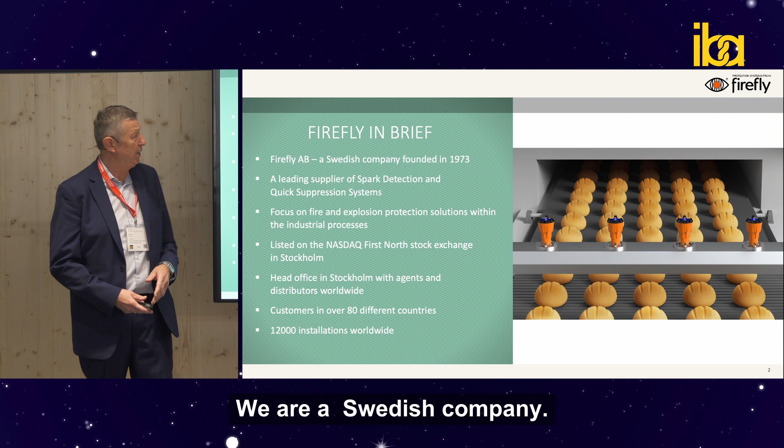Some words about our company. We are a Swedish company, on the market since '73. So actually we had our 50th anniversary some weeks ago.

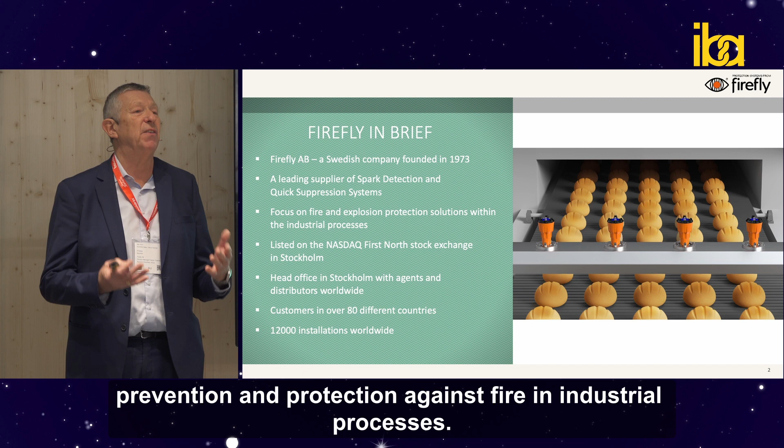We are leading in spark detection and quick suppression systems. What we are doing, actually, for 50 years, is working with prevention and protection against fire in industrial processes. We are protecting the machine. This is what we are doing.

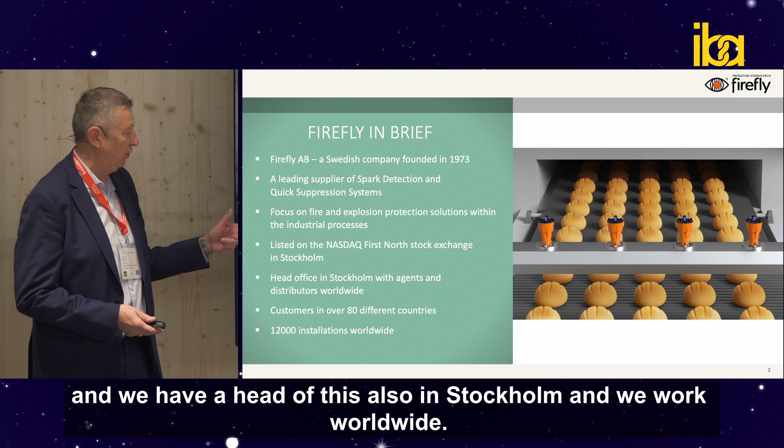We are listed on the Stock Exchange of Stockholm, and we have a head office also in Stockholm, and we work worldwide. We work today in 80 countries, and we have more than 12,000 installations. This is a number of some of our partners worldwide.

And I will start from the basics and look at what the baking industry is. First of all, you have two kinds of baked product: the pre-baked product and the fully baked product.

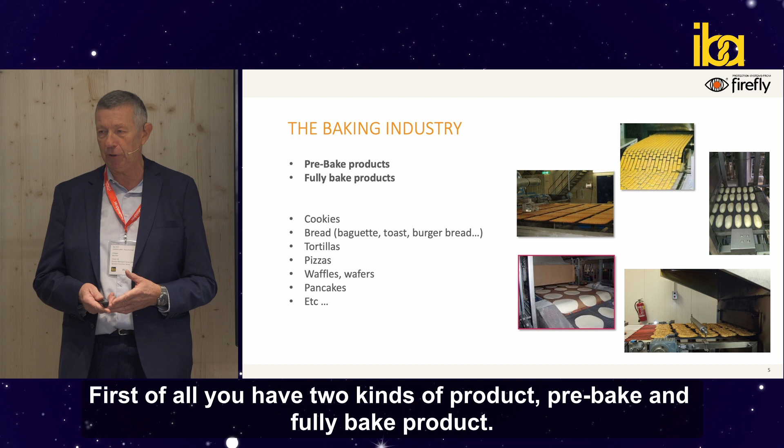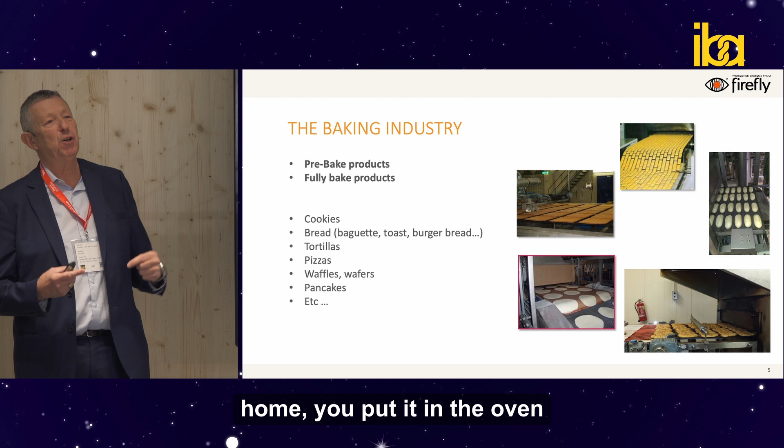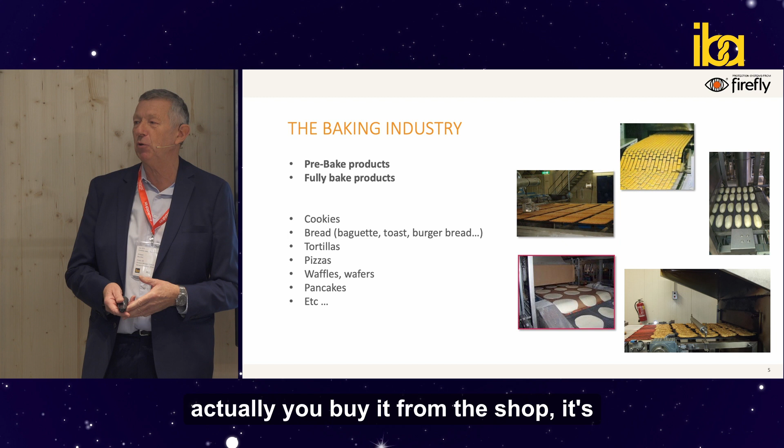The pre-baked product is increasing a lot on the market. You buy it in the shop, it's not completely ready, you take it home, put it in the oven, and make it yourself. It's warm, it's good, it's fresh, it's very nice. Then you have the fully baked product, which you buy from the shop, it's ready, you go home and you can eat it.

So we have a lot of baking products: cookies, all kinds of bread, baguette, toast, burger buns, tortillas, pizza, wafer, pancakes, and so on. All this is in this kind of industry, where you are baking, often through an oven.

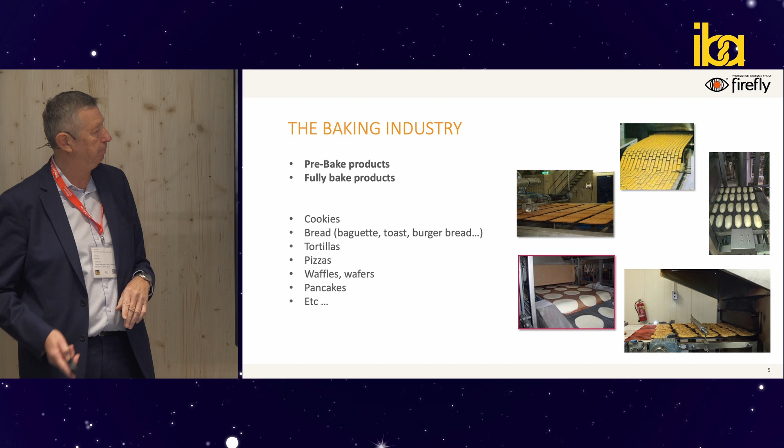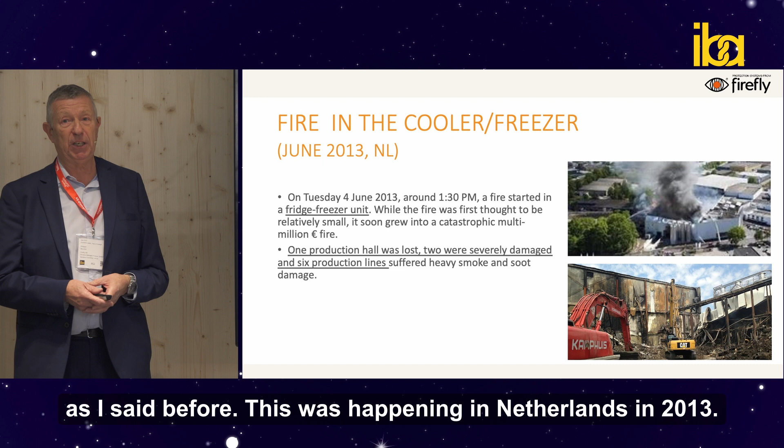Unfortunately, fire is a part of the business, as I said before. This happened in the Netherlands in 2013. It started like nothing, and the whole factory burned down very quickly. I don't want to scare you, but it is happening.

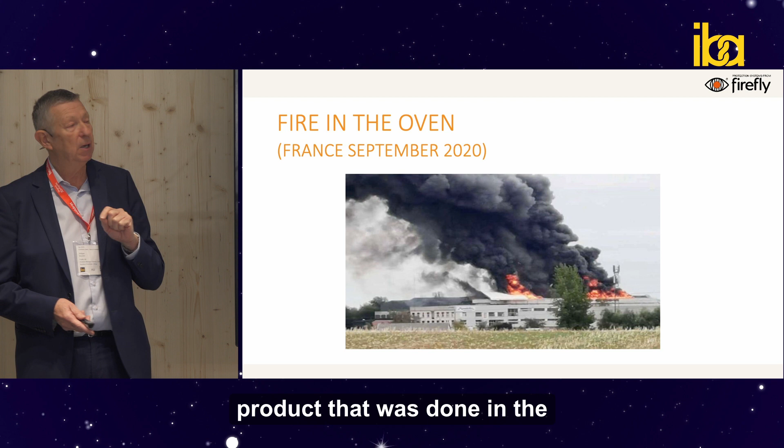This is another one in France, 2020, also starting with a little overbaked product in the oven, and almost the whole factory burned down as well. The last one, in Sweden in 2020, the same thing happened. It started with a small particle that blew up and made a huge fire. The factory was closed for 2 years.

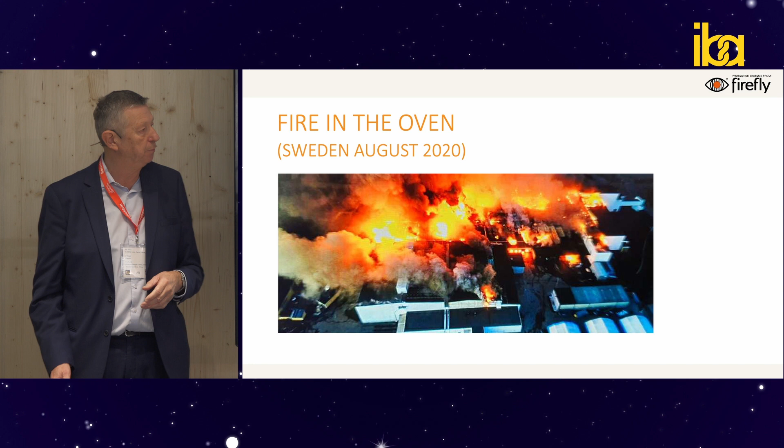So what are the risks in the process? Again, we are concentrating on the process. This is what we are doing.

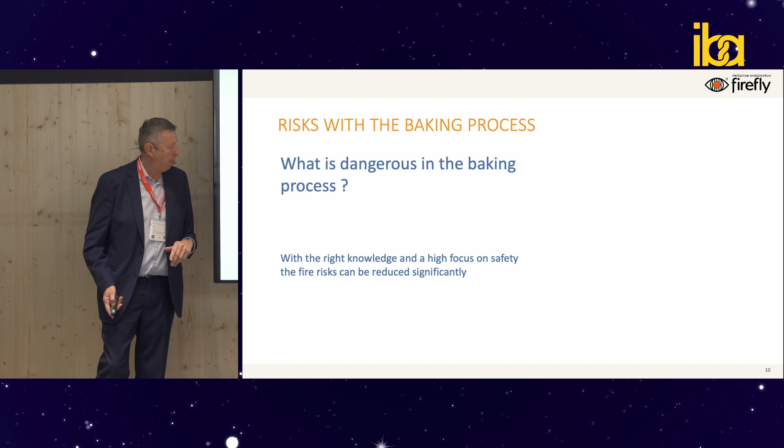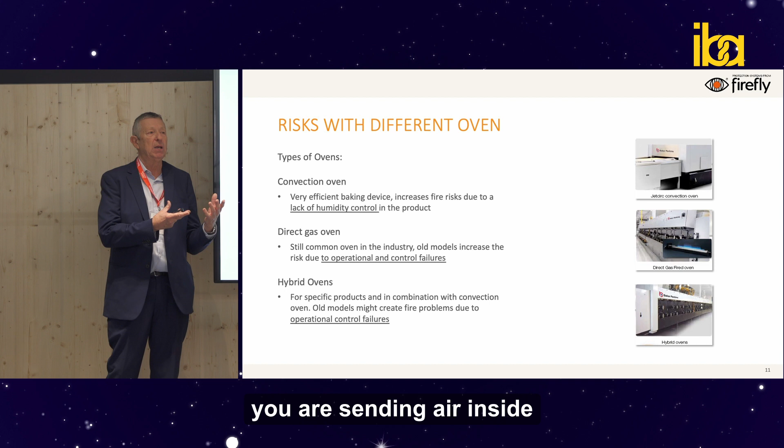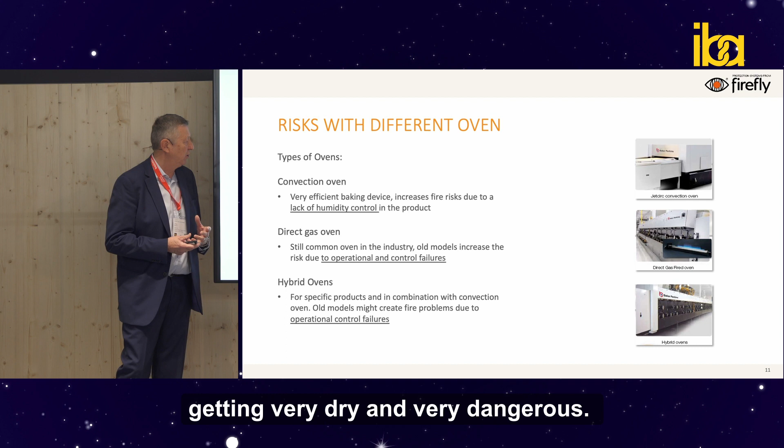First of all, you have the oven itself. There are usually three kinds of oven. You have the convection oven, where you generate energy outside the oven and send air inside from outside. The problem there is a lack of humidity, which gets very dry and dangerous. The second one is the direct gas oven, which is very common.

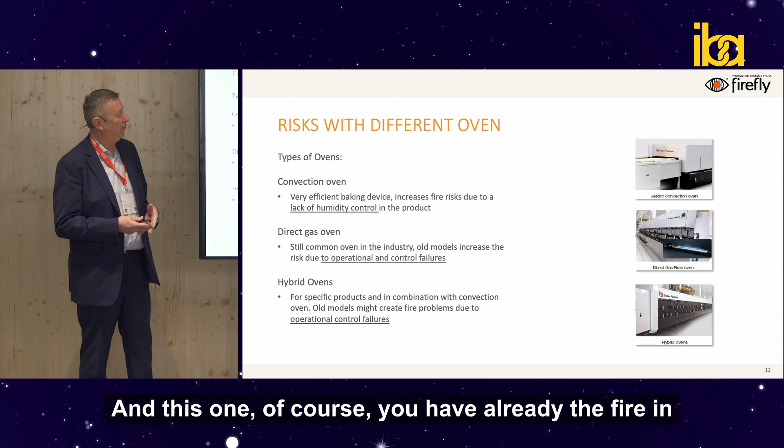Gas, even though it has increased in price, is still quite cheap energy today. With this one, of course, you already have fire in the oven, you have the burner there, so you have to be very careful. The last one is a hybrid, which has about the same problems and risks as the two others combined.

Then there is another part. It has to do with what kind of product you are baking, and also what kind of temperature you are using. As you can see, the pre-baked temperatures are lower than the fully baked product, and you can say that the higher the temperature, the higher the risk.

This goes together, unfortunately. But there is another point: the ingredients in the product. If you have a dry product, the risks are lower. If you have a fat product, butter, oil, and so on, then of course you increase the risk. Sugar, sweetness - if you have sugar dust, it's very, very flammable. The ignition point is very low.

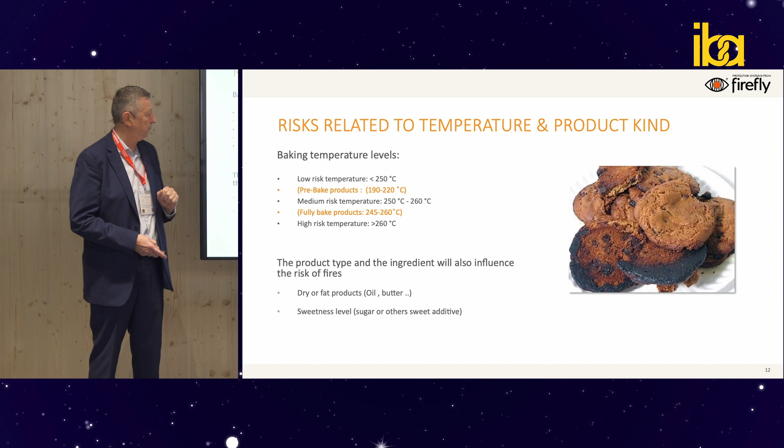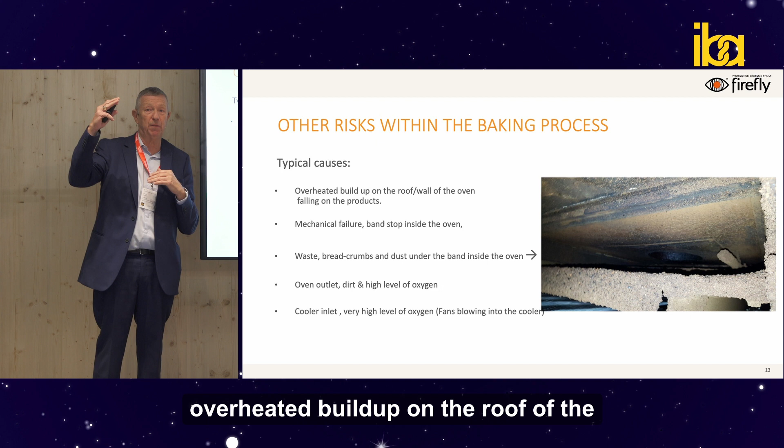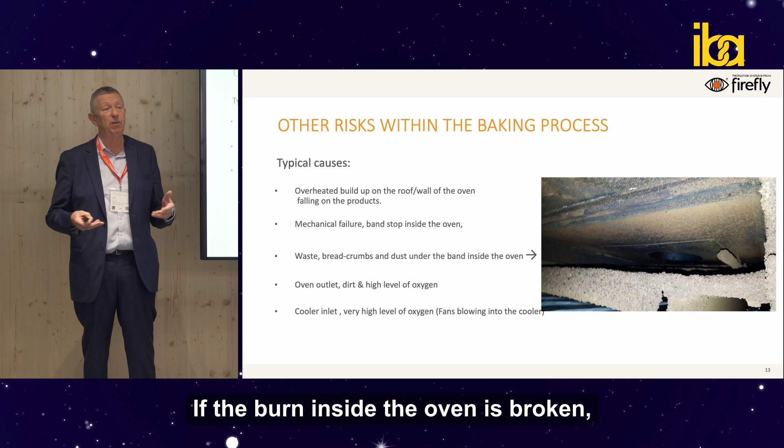So if we look at typical causes, why it's happening: fire, overheated buildup on the roof of the oven, on the wall, falling on the product. Mechanical failure, that's a nightmare. If the band inside the oven is broken and stops in the oven, you can imagine yourself. Everything is burning down, including the machine.

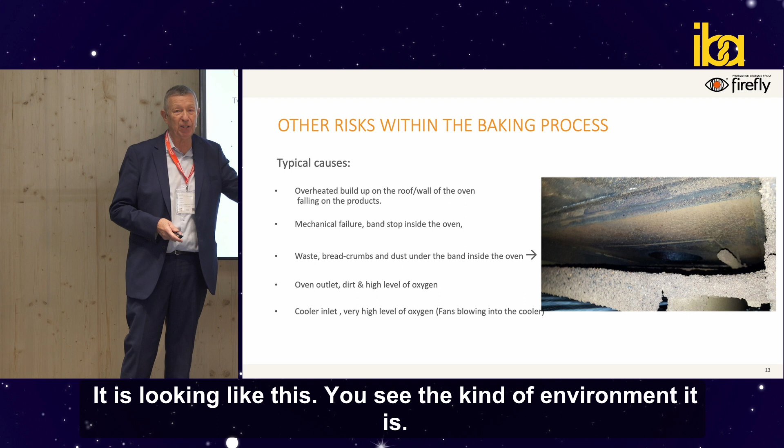You have a lot of waste, breadcrumbs and so on inside the oven. This picture there shows under one band in an oven that is working every day today. It's not unusual for it to look like this. You see the kind of environment it is.

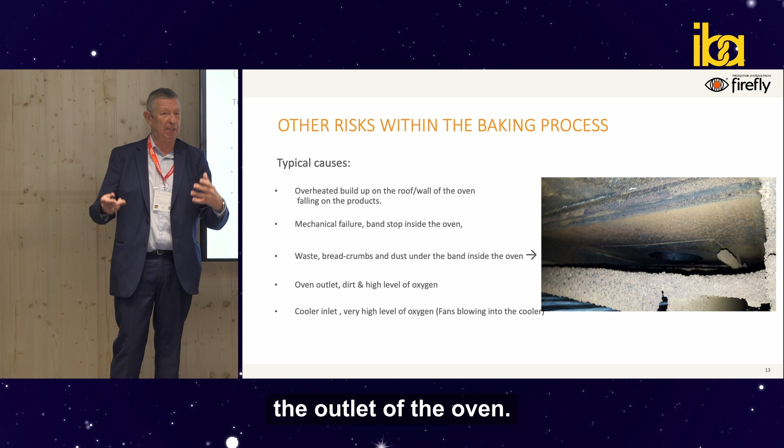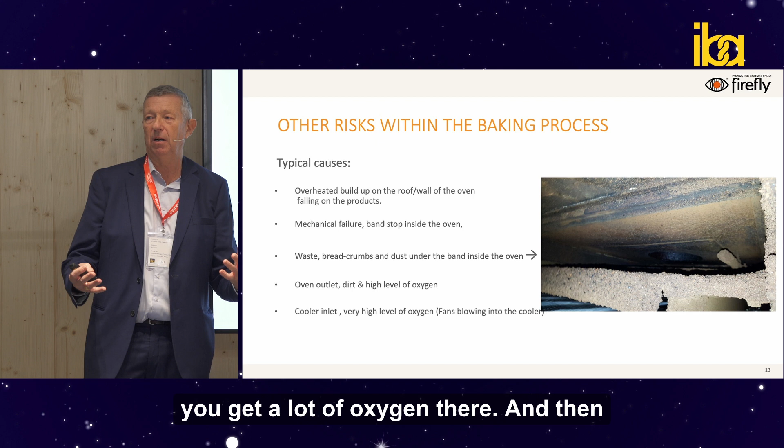Then we have different parts of the oven which are very sensitive. One of them is the outlet of the oven. Why? Because if you have an overbaked product, let's say it's brown or even black, when it's coming out from the oven, you get a lot of oxygen there. And then that will increase the temperature and the fire. There is a very high risk to get a fire there.

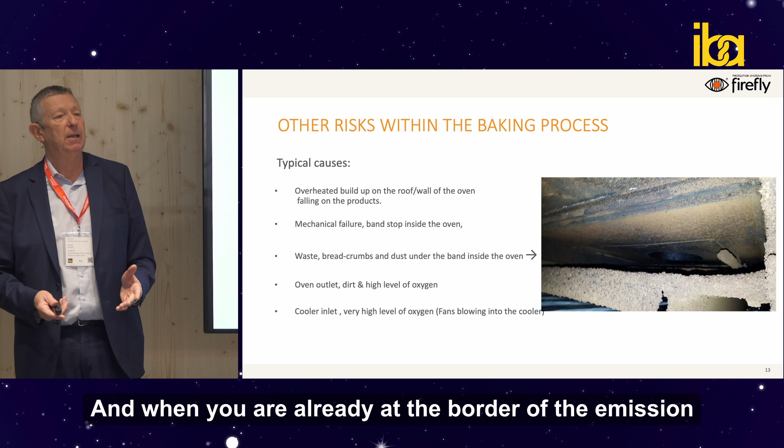The cooler is also very dangerous for the same reason as the outlet, but it's even worse because in the cooler you have a bunch of fans that are blowing cooling air, and when you are already at the border of the ignition point, then with that blowing air, you will increase the temperature very, very much and very, very fast. And then it's very dangerous inside or at the inlet of the cooler.

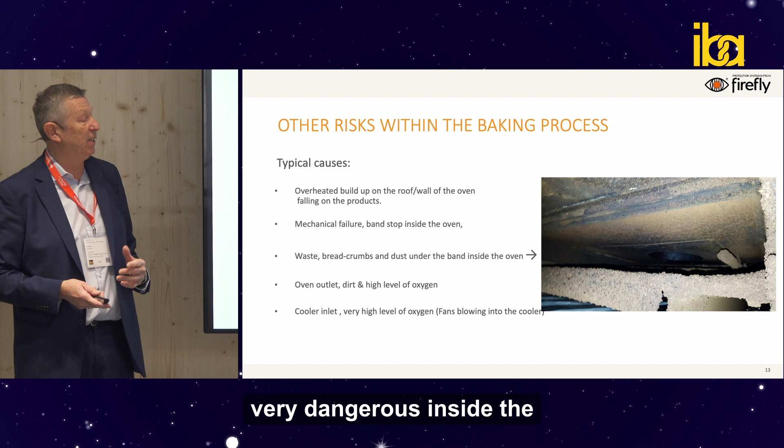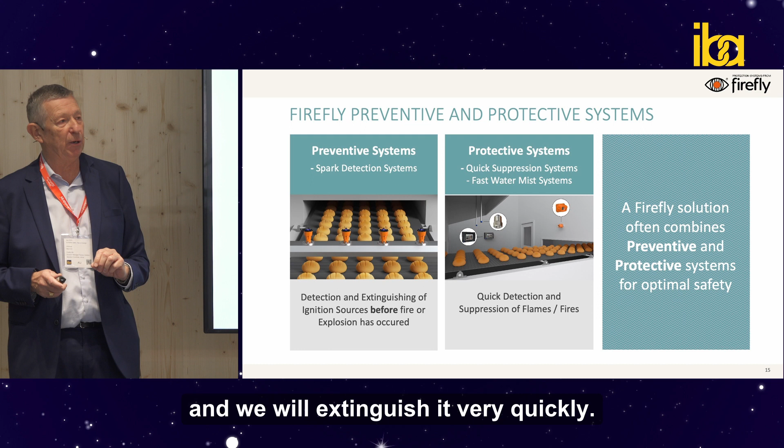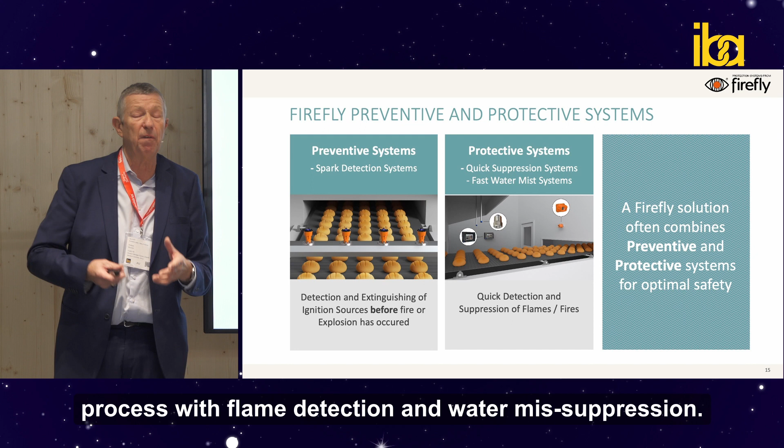So we do have some solutions. We have two main systems. One of them is the preventive system. And the idea with this one is that you have a detection and an extinguishing before something happens. That means that when we detect something before a fire, before an explosion, we will extinguish it very quickly. Then we have the second system that we call a protective system. This one is to protect the process with flame detection and water mist suppression. I will show you more about that. Many times we can combine both systems on the same network at the same customer.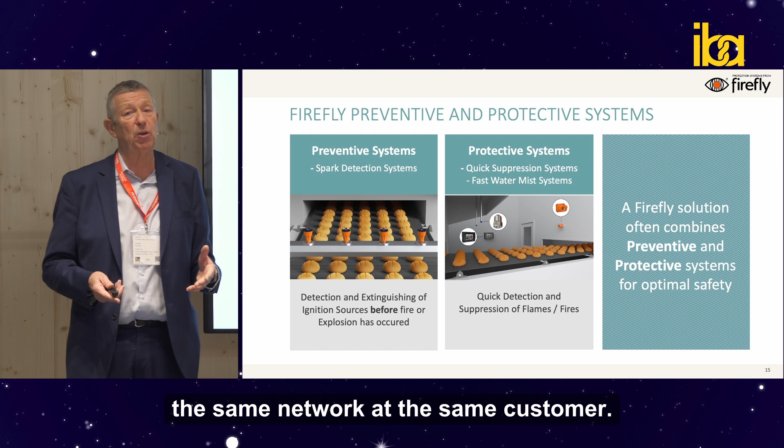So if you look at the spark and hot body detection, on one side you have the detection, with detectors working with infrared technology, very specially. And then you have just after the water mist nozzles. So it's very small nozzles that are injecting water on the product. This is typical for spark detection. I will show you now a little movie. Okay, now we started. So what we will see here is the principle of the spark detection system.

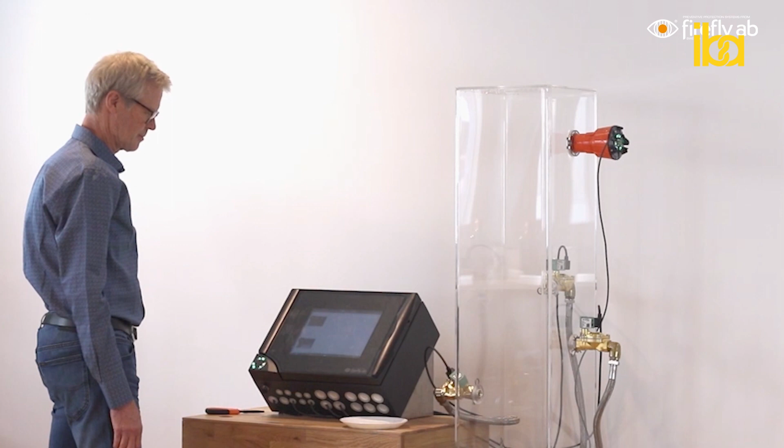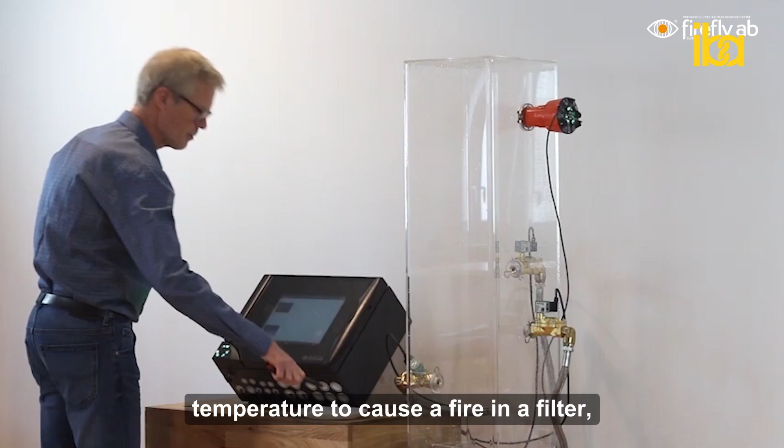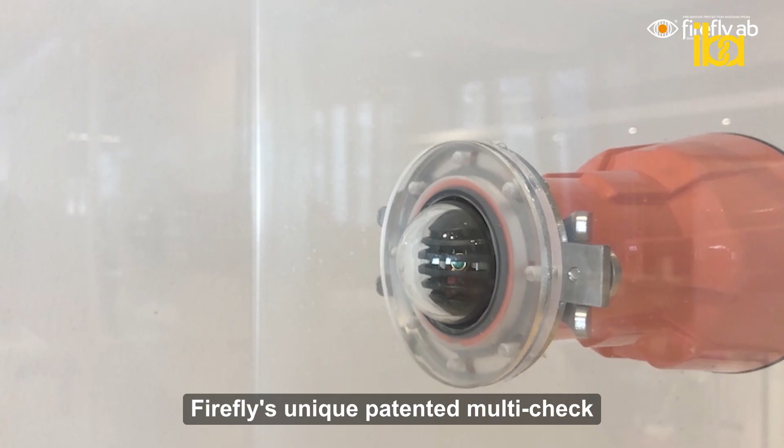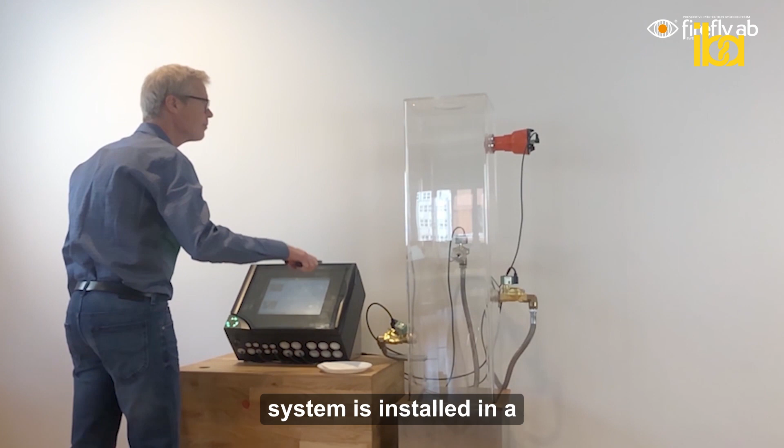This demo shows Firefly's unique and patented protection system. A particle is heated up to a temperature of almost 500 degrees. Note that this is not a spark or a glow. It's just a black particle with enough temperature to cause a fire, in a filter, for example. The Firefly detector recognizes the infrared radiation from the hot particle. Firefly's unique patented multi-check principle can ensure detection quickness and full reliability in process flows in both pneumatic ducts and fall chutes. Once the dangerous particle is detected, it's of the utmost importance to quickly extinguish it. Firefly's state-of-the-art water extinguishing makes sure that dangerous particles are extinguished within milliseconds after detection. As you can see, the system is installed in a plexiglass duct, fully exposed.

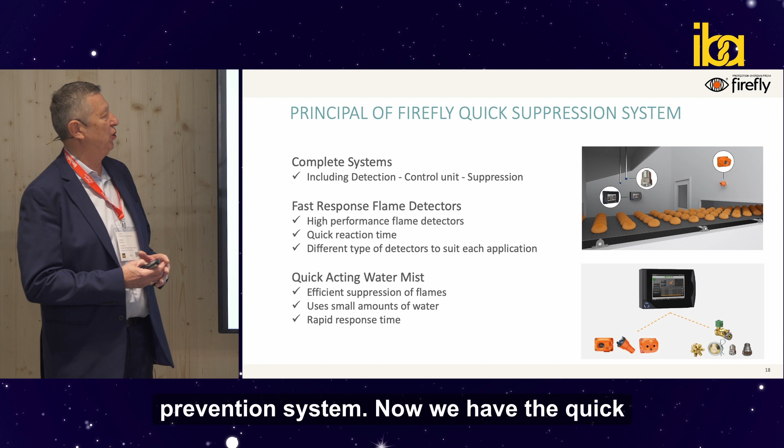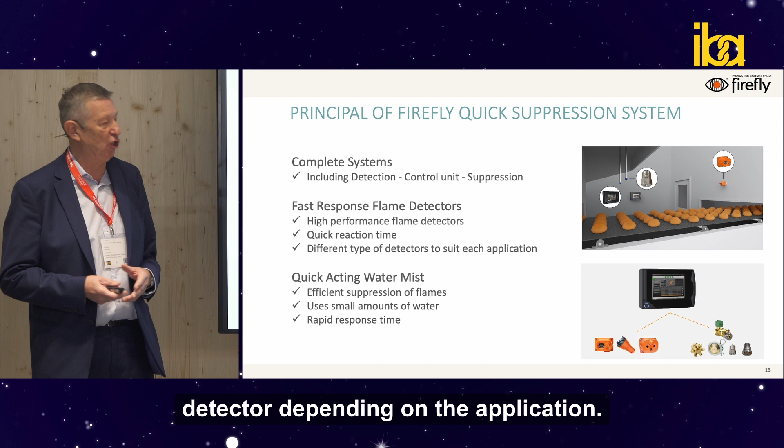Okay, so that was about the spark detection, what we are doing with the prevention system. Now we have the quick suppression system. Again, this is a complete system based on a control unit. You have the flame detection. We have different kinds of detectors depending on the application. And we have a number of water nozzles, which are water mist nozzles. I will show you how it's working also.

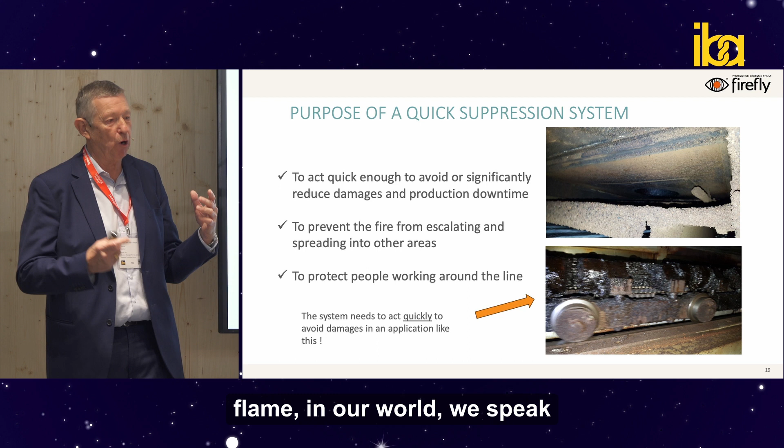So the idea with this one is to act very fast, of course, fast enough to reduce the damage and the production downtime. This is one point. The other one is to prevent it from escalating into other areas, other zones. So when we speak about flame, in our world, we speak about this size of flame. And we don't want it getting worse. Because if it's like this, you can kill it quite quickly. If it's like this, you run away. It's very dangerous. So we want to do it very early at the source of the problem.

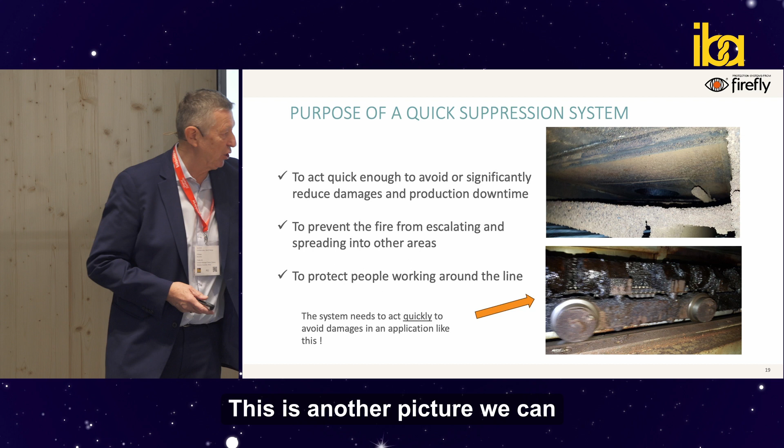And of course, there are people working around. So many times we are saving lives with that. This is another picture of how it can look under an oven when it's running every day.

So we do have dedicated solutions for this baking industry. And all these kinds of solutions, you can use them for any kind of oven and any kind of product. So inside the oven, it's not unusual that you get a fire inside there. In the inlet and the outlet of the oven, and also if we are taking care of the dust extraction, so the chimney at the outlet of the oven.

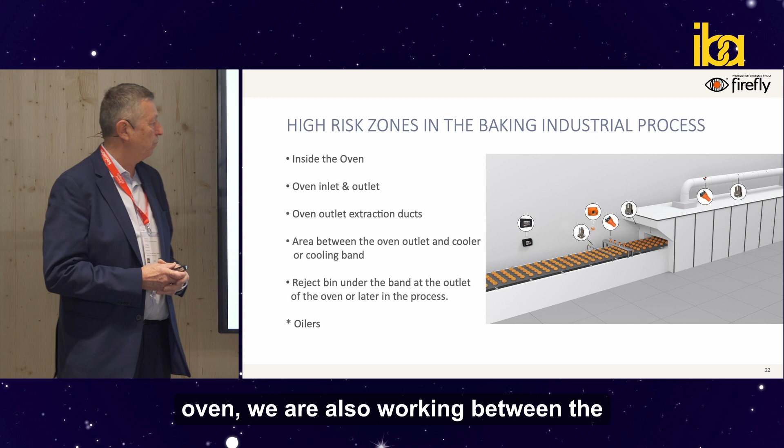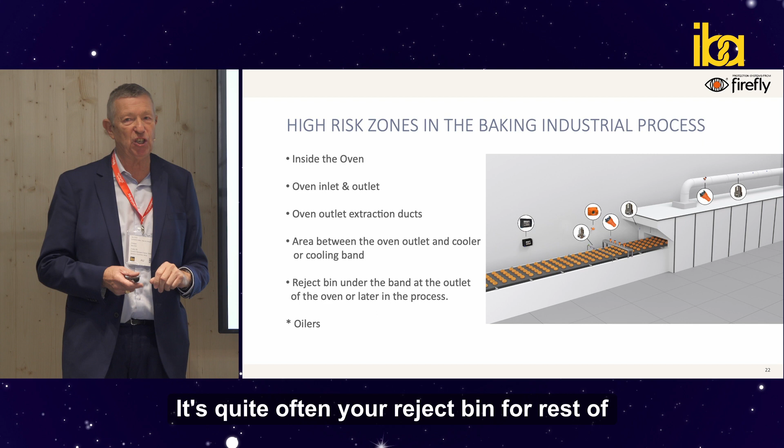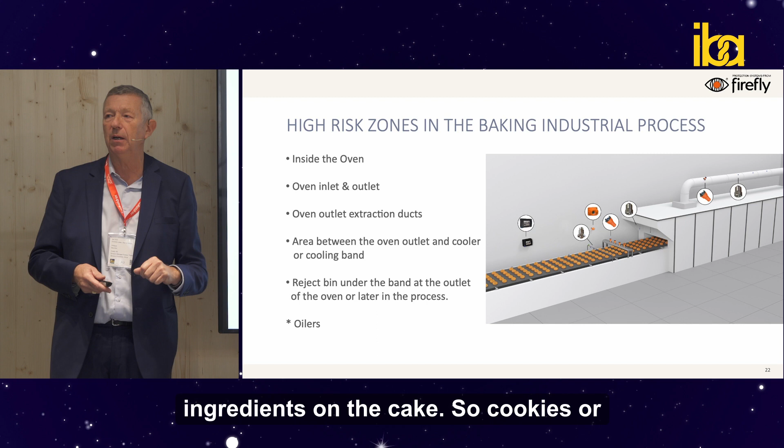We are also working between the outlet of the oven and the cooler, this area. We work also with the reject bin. It's quite often your reject bin for rest of product falling down in the process, and also with the oilers. Many products you need to put oilers or other kinds of ingredients on the cake, so cookies or breads and so on.

So I start with the inside of the oven. Inside the oven, it's very tricky. We cannot put the detection inside there. Why? Because the environment is very tough, as you can imagine. It's very dirty, very dusty, and very hot also. So it's very difficult to have a detection there.

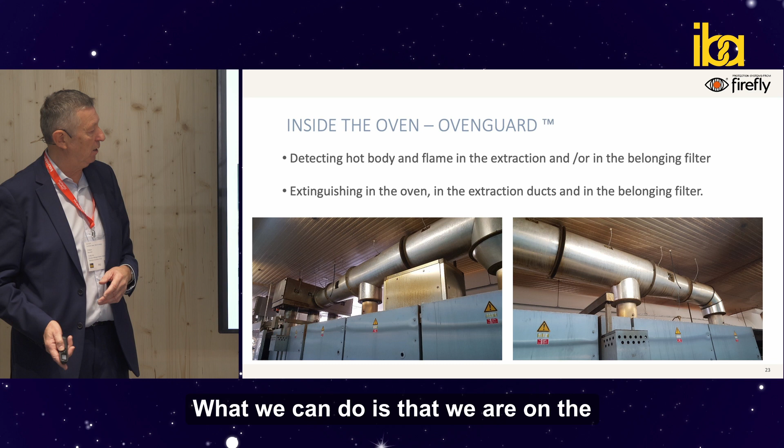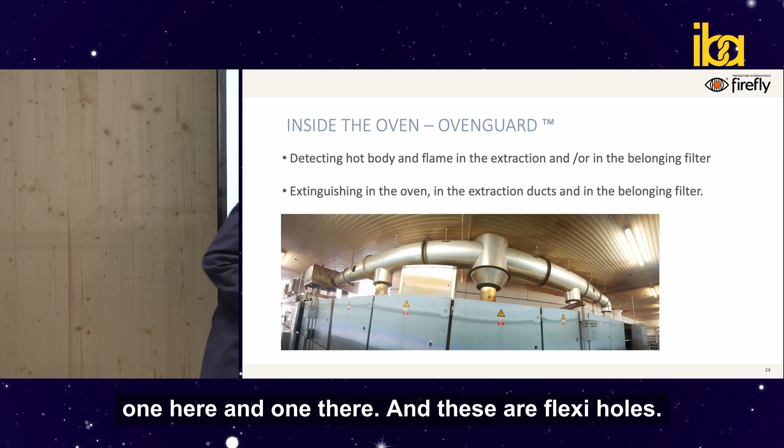What we can do is that we are on the dust extraction duct that you see here. We have a detection here. We don't see it very well here. One here and one there. And these are flexi hoses. So that means that when we're making a detection, we are also doing the extinguishing directly.

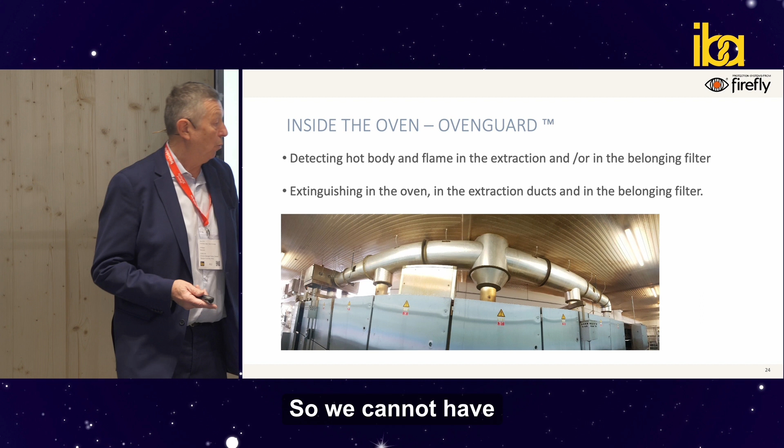So we cannot have the detector inside the oven, but we are quite near. So we will lose maybe a couple of seconds, but it's fast enough anyway. So when we detect there, we have an extinguishing here, but also extinguishing inside the oven.

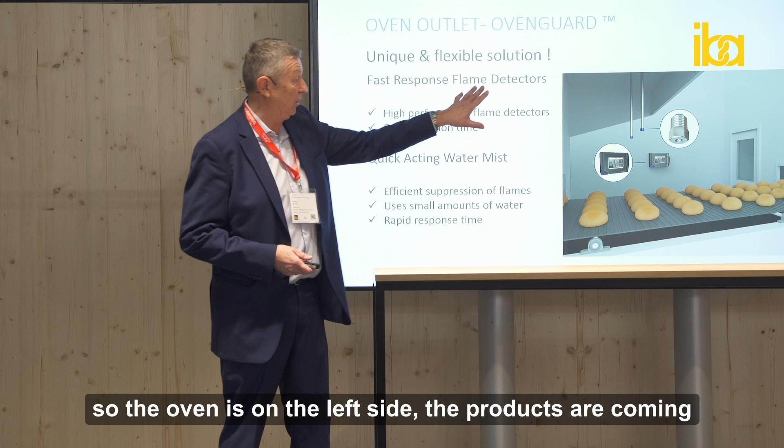If we look at the outlet of the oven now, so the oven is on the left side. The products are coming from the left to the right into the cooler, as you may see there. And what is happening there, many times, as I said before, due to the increase of oxygen, if it's an overbaked product, it will start a fire just at this point.

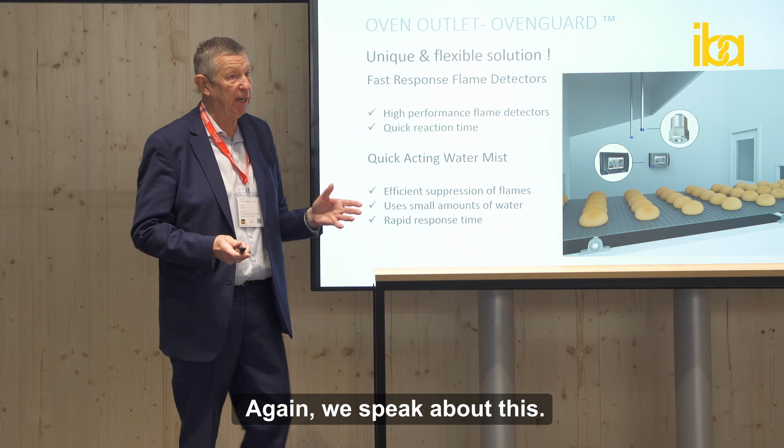So what we do is that we use this detector here, and we are using a couple of nozzles for extinguishing. So this one will look at the whole area of the outlet of the oven. And then we take care of the fire. Again, it's going very fast. We speak about milliseconds between the detection and extinguishing.

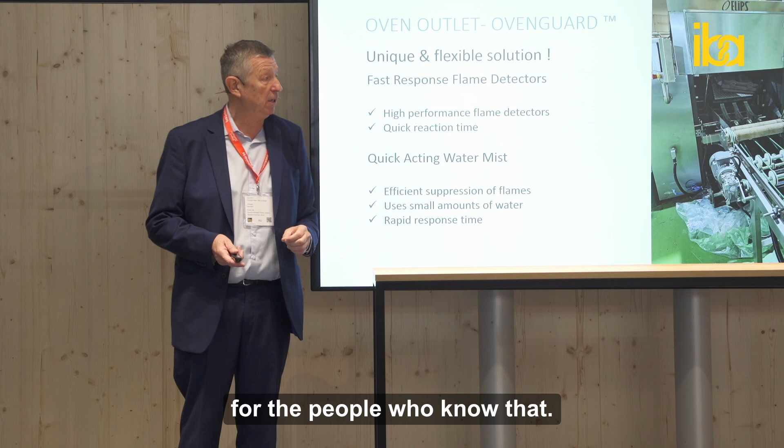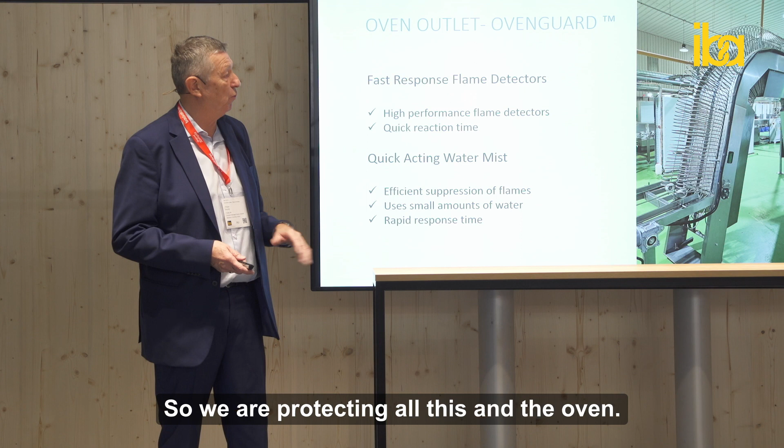We use this also on this kind of oven. This is an oven for wafer, for the people who know that. So we can do that there. We also use it for, this is a cooling arc that you have after the outlet of the oven. This is how we are making the wafer. So we are protecting all this and the oven.

Then we come to the area which is between the outlet of the oven and the cooler. So what we want to do here, actually, with what we call a BakeScan, this detector here, they will detect heat and energy of overbaked product, which means that if you have a product that is brown or black, we want to prevent a fire.

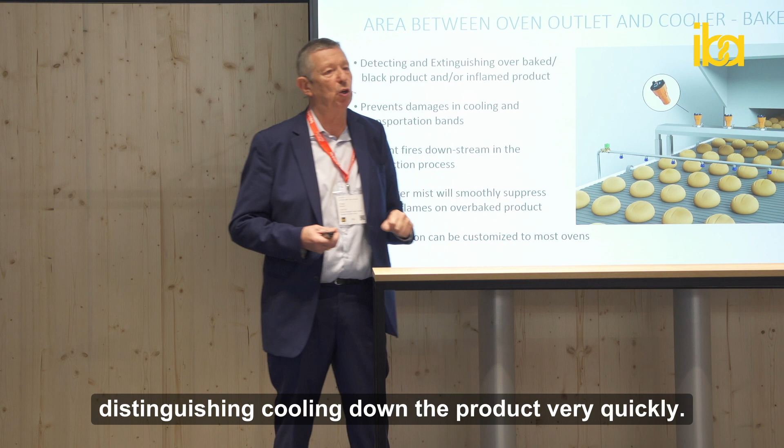So it will be detected here, and just after you will have an extinguishing, cooling down the product very quickly. And this is to protect the product from starting a fire later in the process, if it doesn't start there already.

So now we'll show you another little movie. The oven is on the left side. You will soon see a detector here, and you see this is the bun, and this is a black product. This is an overbaked product, a typical one. Now I will need some help again to start the video.

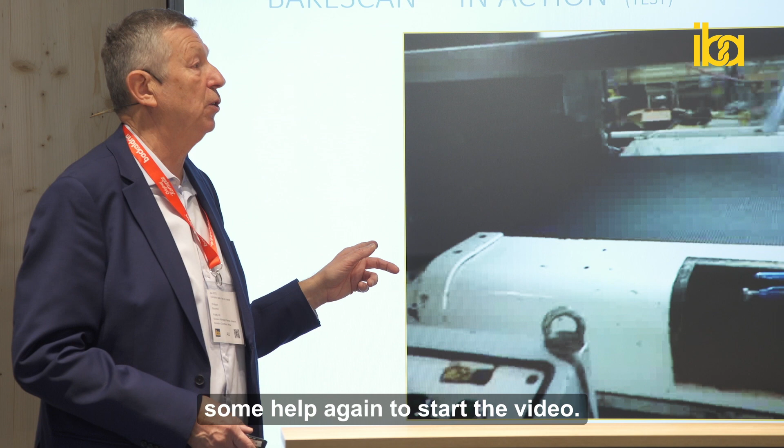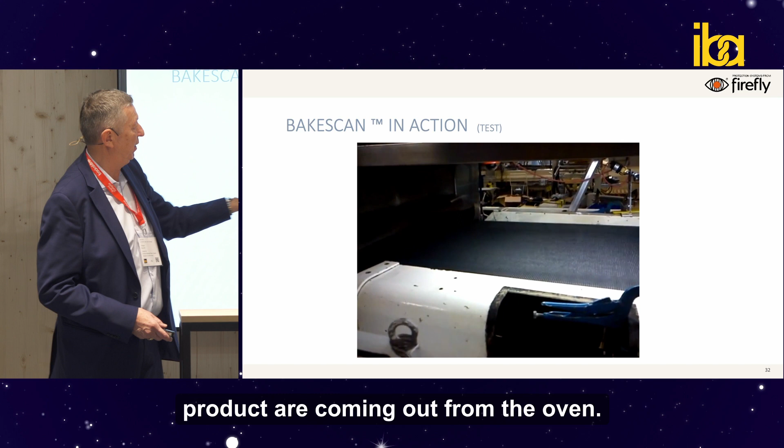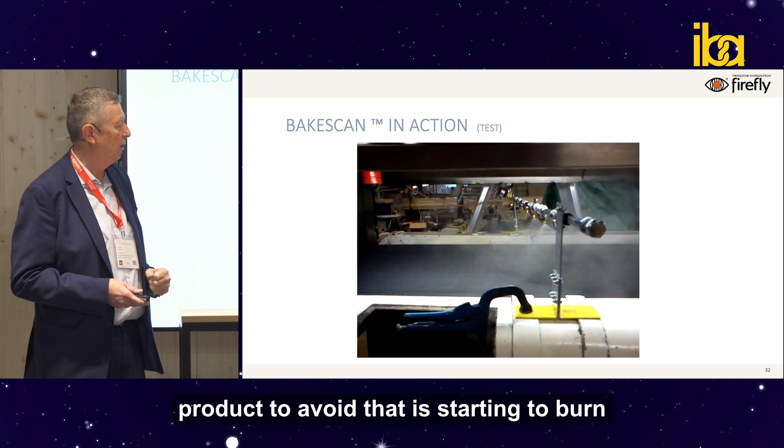So here you have the detector, and the products are coming out from the oven. You will see what is happening. As soon as it is detected, the water is activated very quickly, cooling down this product to avoid it starting to burn later in the process. There's another one coming, if I remember well. Oh. And it's cooled down. That's fine.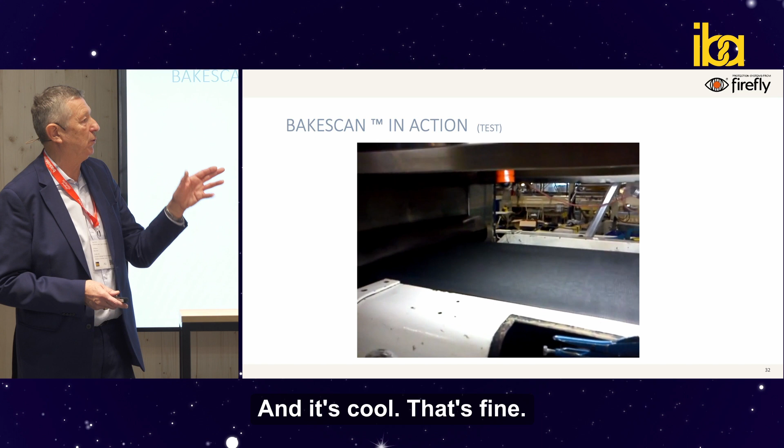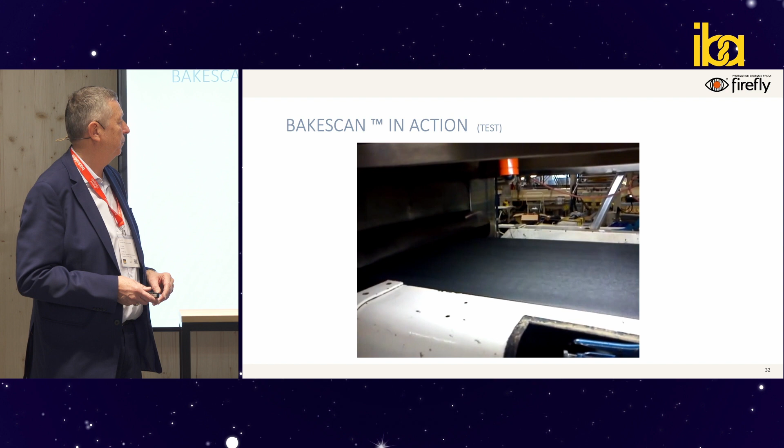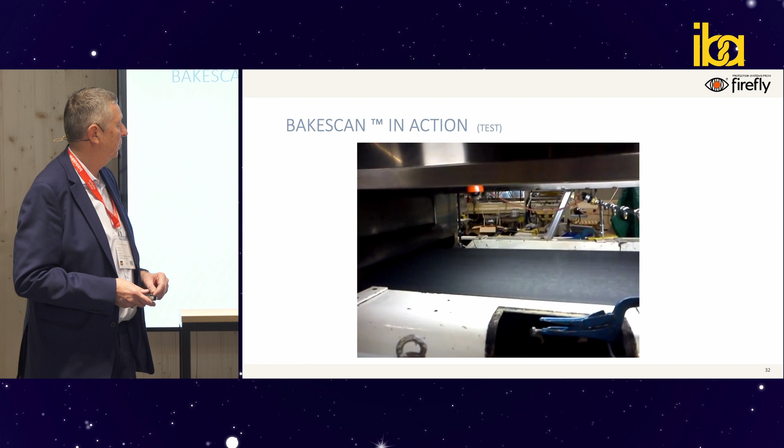I think one more is coming on fire. And it is. So it's detected, and then you kill the fire very quickly. This is really the idea with this detection. Okay?

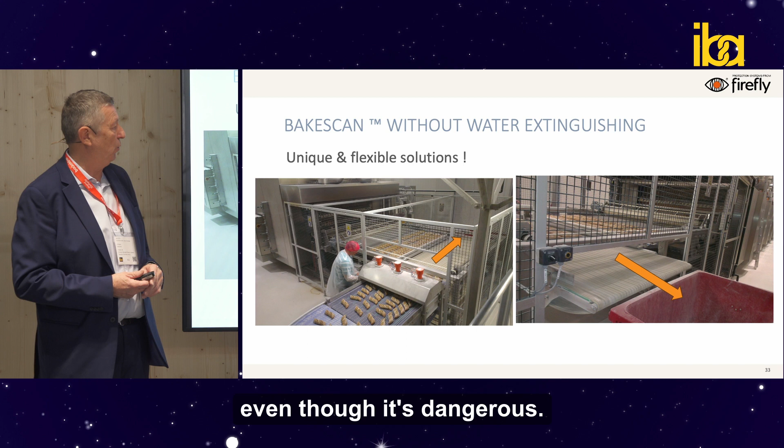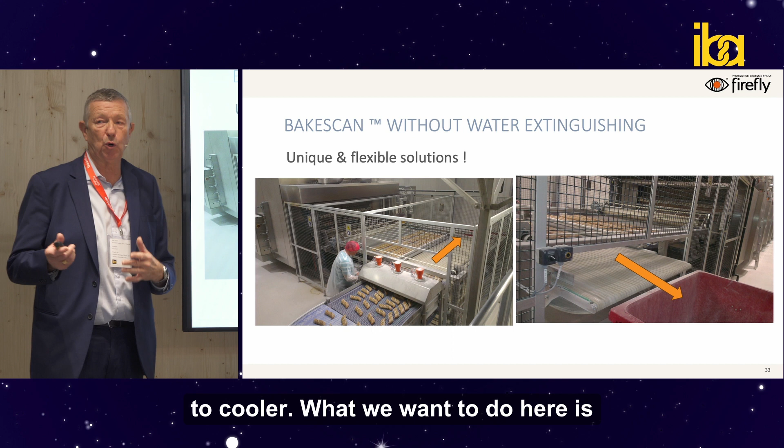So, some people don't want any water on the product, even though it's dangerous. So we do have another solution. This is another oven you see here. The bread is coming out on this conveyor, and it shall go that way to a cooler. What we want to do here is detect if you have an overbaked product.

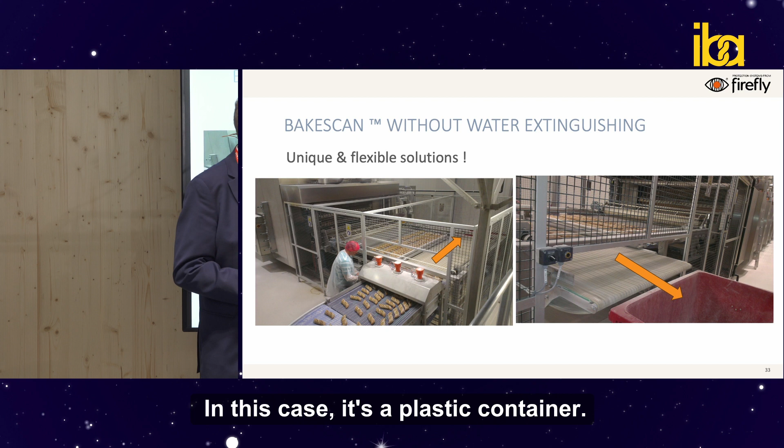So we do a detection here, and when we have a detection, we are connected to our system, we are reversing the conveyor, and the products are going backwards and falling down in a container. In this case, it's a plastic container. Of course, it should be a metal container with a lot of water in the bottom.

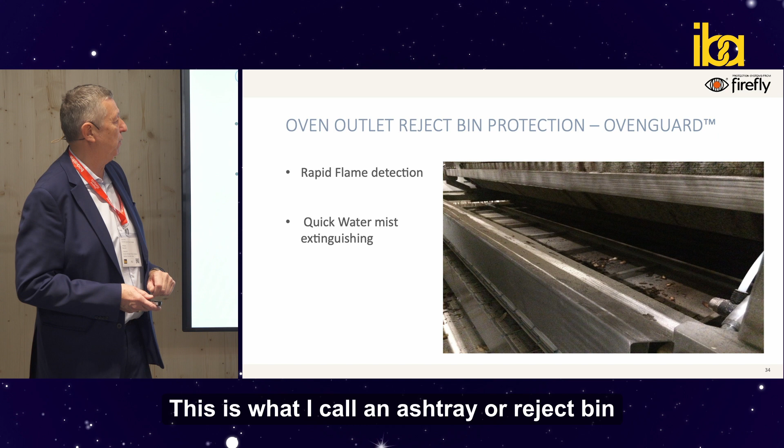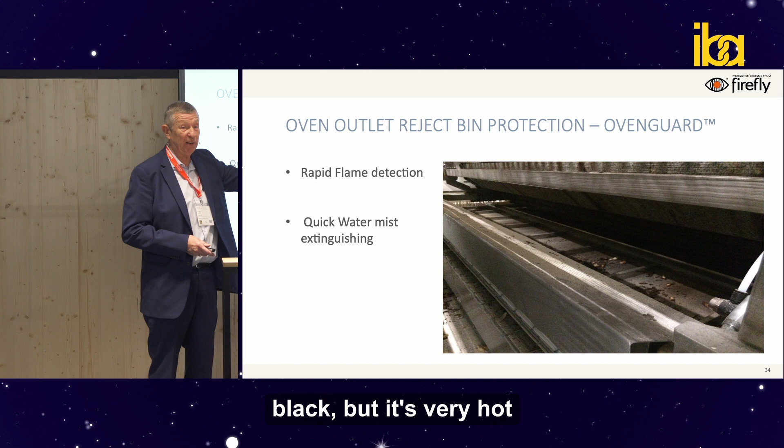This is what I call an ashtray or reject bin that you have under the outlet of the oven. So it's the rest of the bread that is falling down there. As you can see, it's very black, but it's very hot as well. So it's very easy to start a fire at this place.

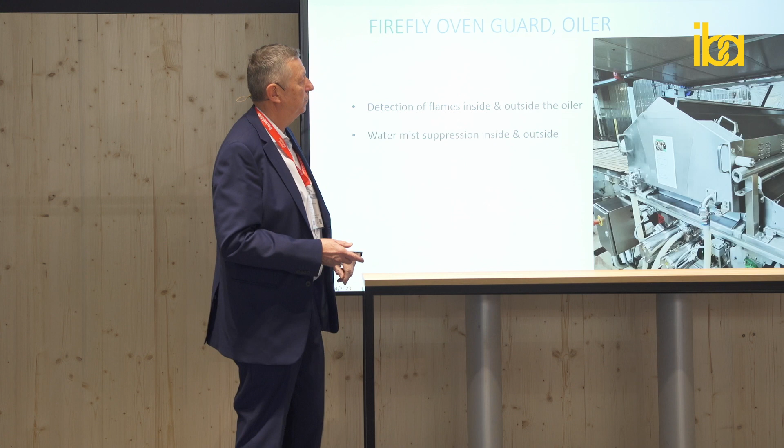And then we come to the last critical zone, which is the oiler. Again, some products need oil. So this one is very dangerous, of course. You have mechanical movement, and as usual, when you have mechanical movements, there is a risk of friction sooner or later. Then you have the heat, you have the oil, you have everything you need to start a fire there. So this is another view of it.

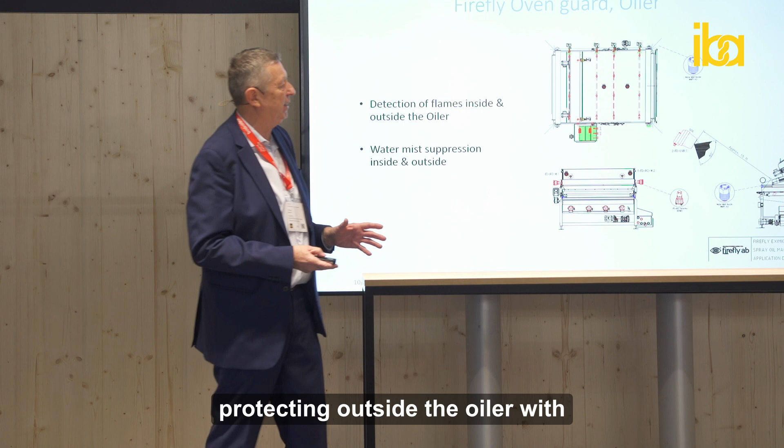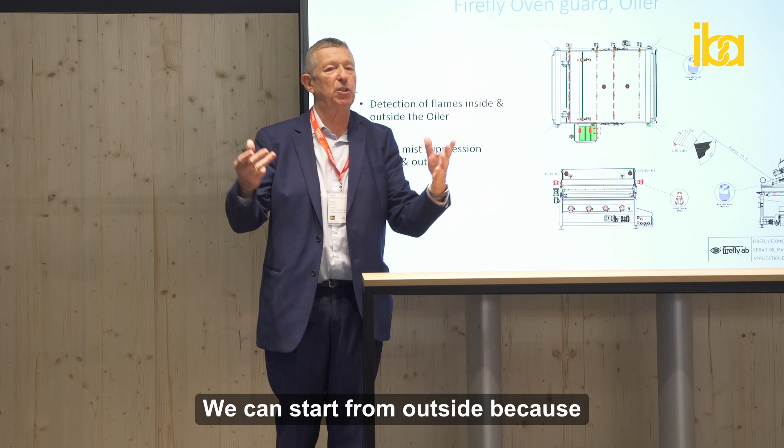And what we do is protect outside the oiler with this flame detection and a number of water mist nozzles, but we are also inside the oiler, because the fire can start inside, or it can start from outside, because you have a lot of oil outside there as well.

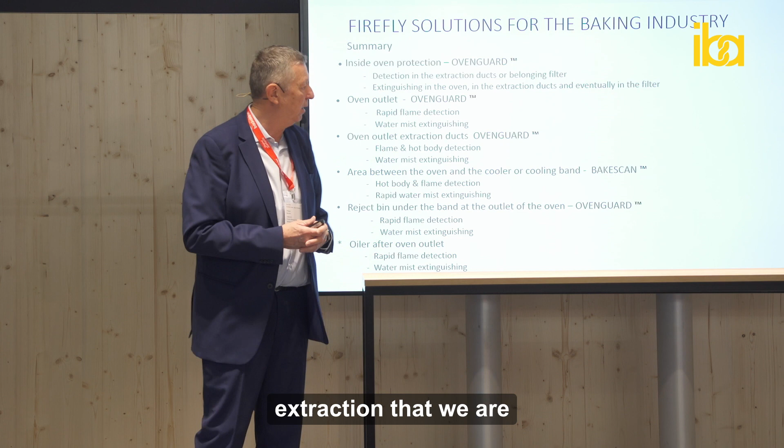Okay, now I'm coming to the end of the funny story. So, in summary, we are protecting inside the oven only with extinguishing, with detection in the duct. We are protecting at the outlet, what we call an oven guard, with very fast flame detection and also water mist extinguishing. We also have the oven outlet duct extraction that we are protecting with another kind of detection.

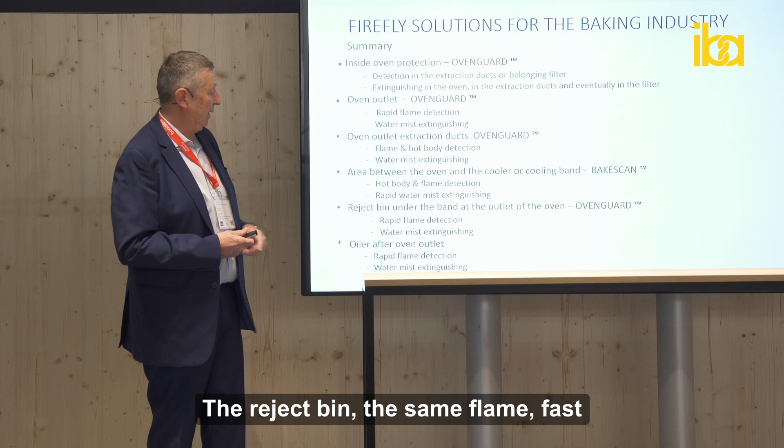And in the area between the outlet of the oven and the cooler, we are using the BakeScan. The reject bin, the same fast flame detection and water mist nozzles, and the oiler with the same technology here.